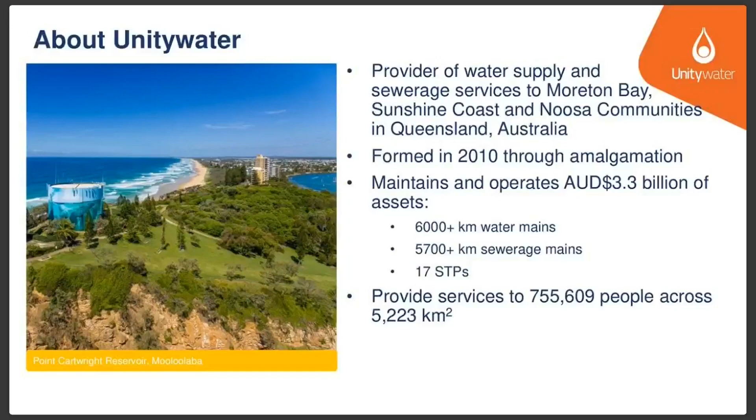If we just jump to the next slide, please, I'll go through these reasonably quickly to try and make up some time. So in the time since we've been formed, there's been a lot of pressure on reducing cost to the customers, our $100 off the bill, and a lot of work has gone into that and forming the business, consolidating a number of things. We started, I think, with 12 SCADA systems and the consolidation that goes with that with the council amalgamations.

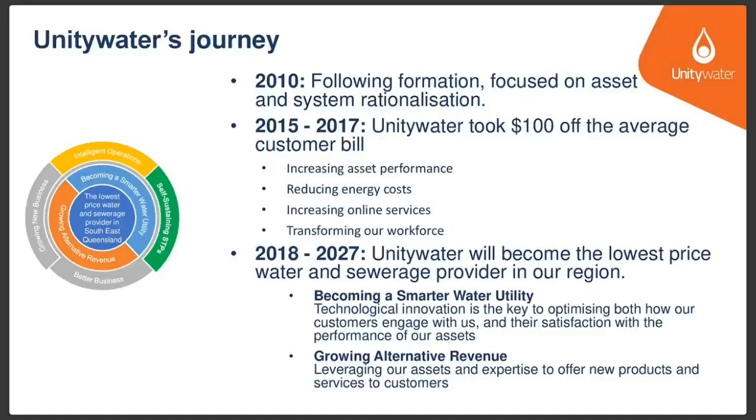So if I just jump to the next slide, there's a lot in that, and I'll spend a little bit of time on this slide, and I'll go through them as quick as I can and just give you an overview of what self-sustaining sewage treatment plants means to us, and then move to intelligent operations. The two are inextricably linked, but I guess in summary, in terms of self-sustaining sewage treatment plants, it's about becoming neutral in terms of cost, energy and carbon.

There's a number of initiatives that we've got up and running and some that we're still planning to do, but if we look at concentrated thermal energy, this is quite novel and new, and it involves heliostats and using heat for biosolid drying. You can also potentially use this, and we want to examine the potential for it to sterilise sludge through pressure cooking and rapid decompression.

To allow that sludge to meet the most stringent of land use requirements, we're liaising with the CSIRO and ARENA, the renewable energy agency here in Australia. Some of the things we're looking at involve footprint size, current state of technology, and our OPEX and CAPEX requirements.

We're investigating a regional resource recovery facility, looking at a number of locations. What would the volume and type of organic matter be? What would our gate fee profile look like? Licensing, state government requirements, and again the CAPEX and OPEX requirements here.

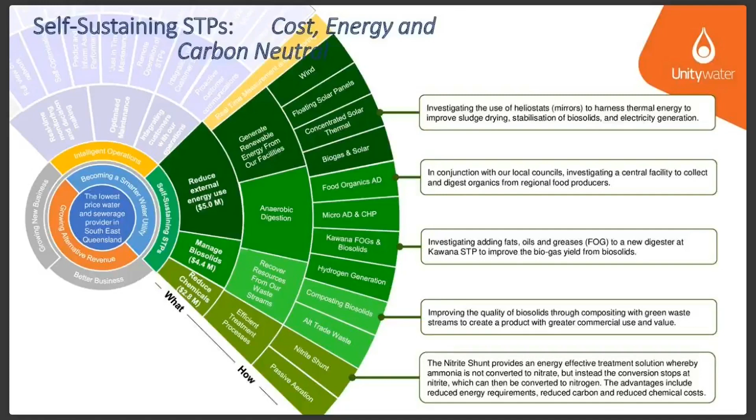So there's a lot in there, and I'm going through quite a bit, but I am very conscious of time for everybody as well, so there might be some questions come up a little later on. If I jump to the next slide.

The next slide's about our intelligent operations. Here what I'm really talking about is, if you take our roughly 12,000 kilometres of combined sewer and water network, it's currently what you might call dumb and passive. How can we make that smart and active? How can we know about events occurring in our water and sewer network before our customers tell us? I think it's incumbent upon a really smart water utility to be able to know that, rather than wait for the customer to inform them.

So I'll go through a couple of these again reasonably quickly. If I focus on sewer monitoring, we're looking for live online sewer monitoring for odour, picking up trade waste transgressions, seawater ingress, identifying odours potentially before they even occur, and if they do occur, certainly knowing about them before the customer does and informs us.

And also there's some intelligence in there with some analytics around asset degradation. If you know the profile of the content of your sewer pipes, and you know your sewer pipe condition, what it's made of, and how old it is, there is some technology that can assist us in determining what our sewer profile is doing from an asset condition perspective.

That kind of intelligence also has an added benefit, because not only are we fixing something for the customer immediately, but the long-term saving in terms of deferring capital, and that saving potentially being passed on to the customer by reducing bill increases, is an important element of that.

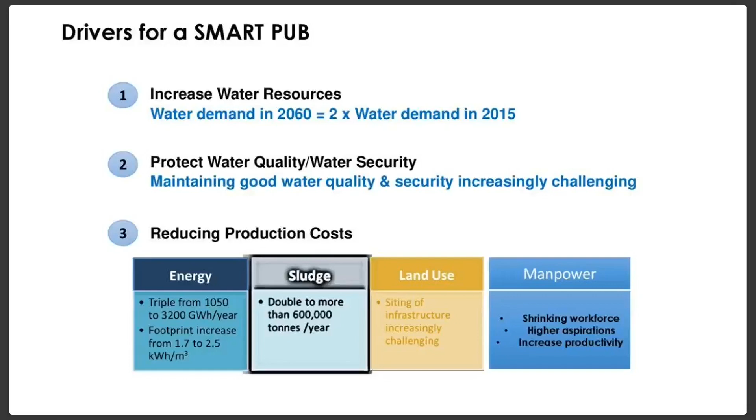So we're looking at 5 main technology enablers to help us achieve that. Of course, IoT - getting data, getting pervasive sensing, getting connected through sensors and devices. With all this data, we're going to fit it into our data analytics platform that will give us new insights as we harness this big data. With these new insights, we're able to fit them into simulations and models to give us insights and plan for what-if scenarios. We also look into artificial intelligence, that is machine learning, for decision support systems. And finally, autonomous systems to replace manpower for the dull, dirty, and dangerous work.

So I'll go into sharing some of the initiatives that we have implemented in PUB.

First up is the Silt Imagery Detection System, which we call SIDS. What it does is help prevent muddy waters from construction sites flowing into our waterways and reservoirs. This simple technology, using CCTV, has been implemented since 2013.

Earlier this year, we collaborated with one of our universities to implement this analytics to automatically monitor the CCTV footages.

SIDS has helped PUB streamline our enforcement efforts. Before SIDS, PUB had to conduct random checks based on CCTV records, which can be sensitive and problematic when we need evidence for prosecution. With SIDS, PUB can monitor real-time data from CCTVs and prioritize problematic sites for follow-up. So far, we have detected more than 150 cases from around 500 CCTVs since 2016.

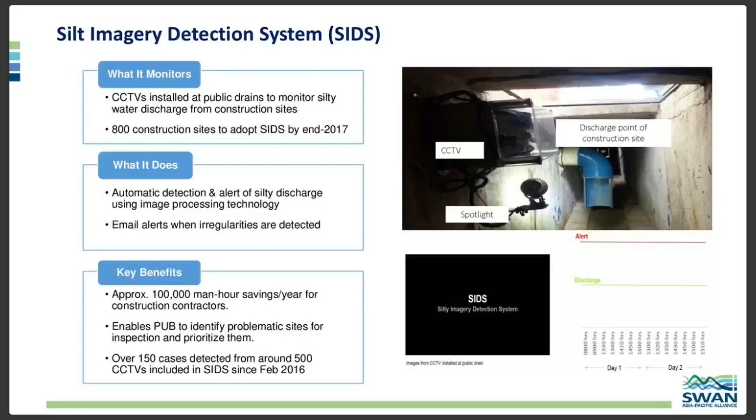Next, I'll share a bit about our water supply network. We've implemented this Smart Water Grid with the objective of helping PUB supply good water 24/7 to our customers. We now have more than 320 sensor stations, covering 75% of our network today.

We're able to better feel the pulse of our network by constantly monitoring the pressure, flow, and quality of our water network. Using this information, we detect pressure and water quality anomalies, and we leverage data analytics to forecast water demand, as well as model different scenarios, so as to better support our planning, operations, and maintenance works.

Some of the benefits highlighted here include pressure management, leak and burst detection, operation simulations, hydraulic modeling, demand prediction, and water quality monitoring on a real-time basis. These are new capabilities that we're developing as part of our Smart Water Grid project.

We are still at the beginning of our Smart Water Grid journey, and we believe challenges still lie ahead, in terms of quality and reliability of the sensors, as well as pattern recognition and the accuracy of the analytics. So we look forward to working with more companies and technology providers to test our solutions in our operational conditions.

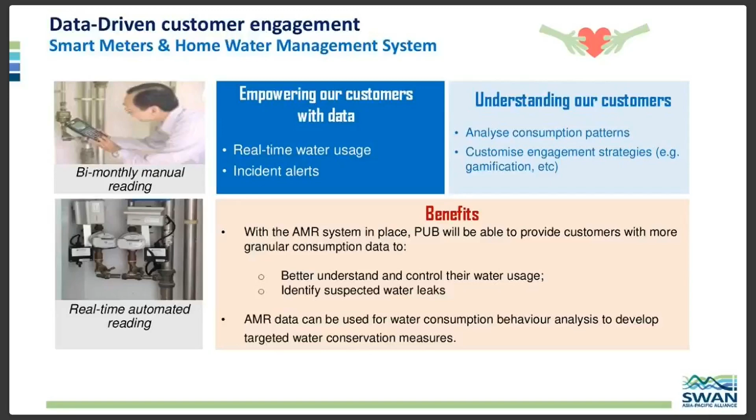With this data collected, from PUB's perspective we are able to understand our customers better by analyzing their consumption patterns, and we can do customer segmentation as well as customize engagement activities and strategies to achieve better results.

Also on the topic of smart water use in residential context, we are now rolling out smart showers, as we want to drill down to the individual water usage areas within the household.

In Singapore, it's hot and humid all year round, with a temperature of about 32 to 34, 35 degrees Celsius every day. So a typical household uses as much as 30% of their water for showers. People take showers maybe twice a day, sometimes 3 times a day, depending how hot the weather is.

PUB relies on technology improvements in the design of shower heads to try and reduce shower water usage while maintaining comfort levels, not compromising comfort. Earlier this year we conducted a trial with a university to collect data with 520 households. Water consumption meters were installed in their shower heads so that end users are able to be aware of how much water they're actually consuming while the shower tap is left running.

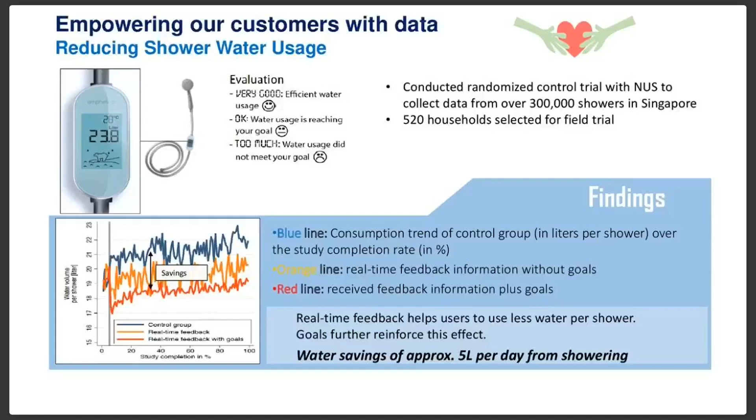Some of the results from the trial showed that providing real-time feedback helps users use less water per shower. Probably it's psychological, but it is useful, it seems. We achieved some 5 liters per day per capita of water savings after installing these meters, compared to a control group without smart meters in the shower. So we see great potential in providing real-time data and feedback to end users. We think it's powerful, cost-effective, a simple and affordable device to influence water usage behavior and help households save water.

On the topic of smart plants and our operations, we're embracing smart technologies to enhance operation and maintenance, looking at IoT sensors, vibration sensors, which we install on our rotary equipment such as blowers, pumps, compressors, to give us real-time assessment and condition sensing of the performance and energy efficiency of this equipment. With this real-time data, we're able to better plan for maintenance - it's predictive maintenance rather than preventive or corrective maintenance.

We monitor pump performance through these IoT sensors, and pass all this information through a data analytics platform that will analyze and do some signature patterning. They can tell us if a pump or a specific compressor is going to fail, which helps us avert any catastrophic or major failure.

Currently we have about 100 of these sensors installed in some of our plants, and we're analyzing this data for trend analysis. It will also help us set better trigger points for different equipment - not too conservative or excessive, and not too little - so we're able to better optimize each maintenance schedule. It provides insights before the equipment needs to be serviced, before any failure.

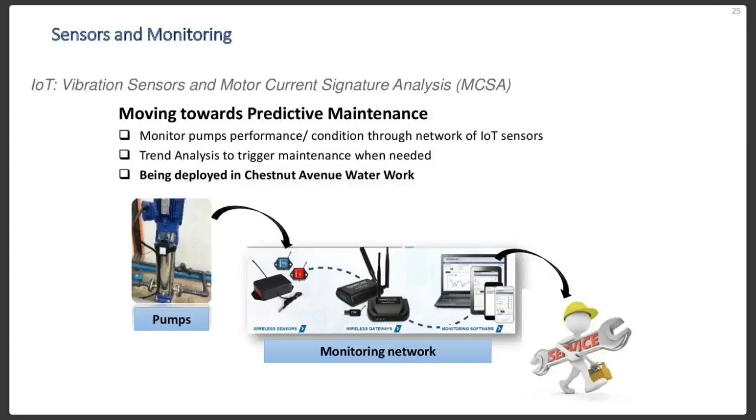Moving into robotics - some of the projects we've done using drones. One area PUB is looking at very actively is using aerial drones beyond just collecting images, but also as a mobile sensor to collect data, especially spatial information of our water quality in the reservoirs and large water bodies.

An example here is hyperspectral technology used to monitor water quality in reservoirs. These can be integrated with a drone for more flexible use, overcoming the constraint of a fixed system. Before installing hyperspectral cameras on drones, we initially had a phase 1 project where we installed permanent hyperspectral cameras at different strategic places in our reservoirs. It captures water quality data - aquatic mapping, turbidity, chlorophyll A readings in different pockets of our reservoir, which was very useful to us. To take it one step further, we're now implementing drones to deploy this hyperspectral technology.

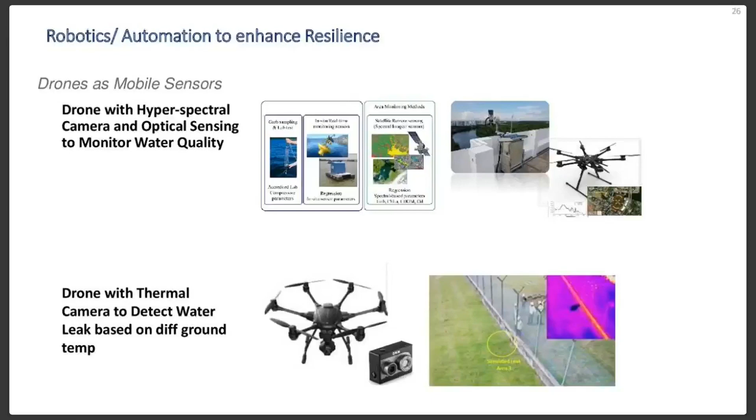In summary, the integration of smart water technologies across Singapore's water loop is our vision for the future of water management. It has to be integrated as a whole to derive synergies and benefits, driven by innovation, informed by data to make informed decisions. So PUB aims to manage the water loop more productively and efficiently.

We need real-time feedback and analysis for better sensing. We need accurate simulations and models to allow us to preempt and manage any potential upsets or impacts. We also want to apply the latest, most advanced technologies to further automate our processes. This is expected to improve our planning, operations, and service delivery to the public.

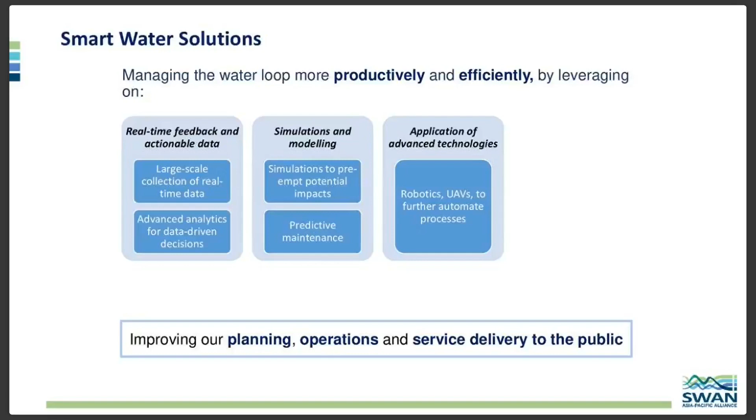This slide shows an integrated smart water loop. The vision is that a smart operating system is built by several smart subsystems working in tandem and in sync with each other. In PUB, we manage the entire water loop from the first drop of rainwater that falls in Singapore.

We collect it via our drainage, our canals, sends it to the reservoir. From the reservoir, we treat this water at our water supply plants. The treated water, the potable water, is then supplied to the taps, to the industries, to the residential areas.

This drinking potable water is supplied via underground asset of 5,000 kilometers of network to our end users, and then it is collected by our water reclamation network, which is conveyed to our water reclamation plant for treatment, either for discharge, outfall, or some of you may have heard about NEWater, which is a high-grade reclaimed tertiary grade water, reclaimed water, which is supplied to the industry for direct non-potable use, and some NEWater is also used to charge our reservoirs.

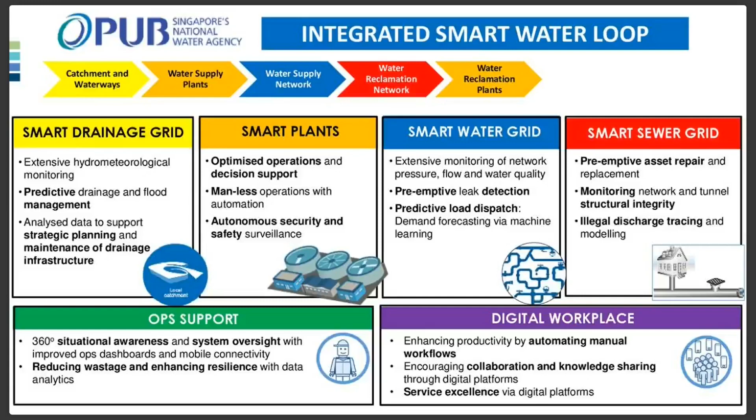And then wanted to add that all of our operations are actually underpinned by a sound foundation of operation support and digital workplace, which we are also in the process of digitalizing and transforming to better support our operations.

So this is my last slide, the concluding slide. As I mentioned, business as usual is not going to be sustainable for PUB and for Singapore. We need to integrate an integrated and proactive management of PUB infrastructure and assets. As with today's workforce, we have about 3,000 strong staff. We need to upskill them to embrace technologies. And right now we're doing a lot of technology deep diving.

We're engaging the industry a lot to develop solutions for us. And these solutions are not immediately deployed in full-scale installations. We typically do piloting and validation and small-scale setups, either in a pilot plant or a demonstration plant, before we scale them up further. And then when we are confident, we will then specify these technologies in our full-scale tenders.

With that, I end my presentation, and thank you very much for your attention.

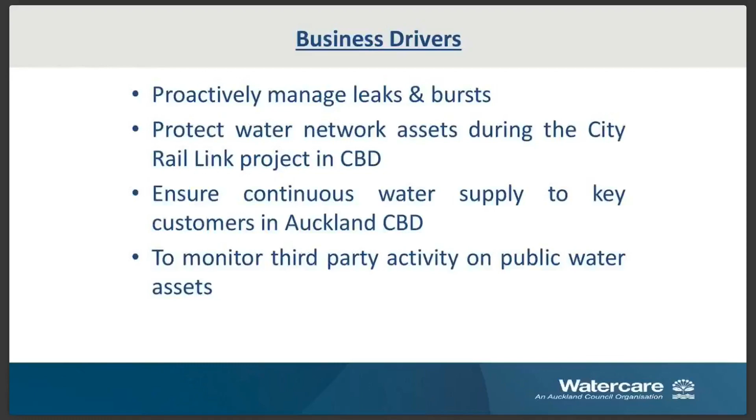So the solution we implemented was a sensor-based solution to collect high-frequency pressure and acoustic data. It measures pressure 256 times a second and acoustics hourly. We put 15 pressure sensors covering 130 kilometers of pipe works, each sensor typically covering around 9 kilometers. We also installed 15 hydrophones for acoustic data to look for small leaks in the network. All this data is collected and the analytics is provided by our chosen vendor for this solution.

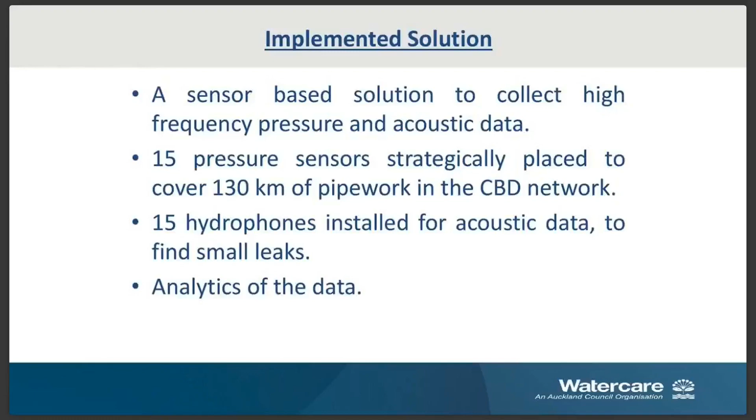The key features of this solution are to report the status of the network and provide analytics from the data, and importantly, to get notified of events within 30 minutes of them happening. We also want to predict future failure points due to water hammers in the network, and this enables us to track network changes a lot more easily.

So what I'm going to do now is pass you on to Nish, who's going to tell you a bit about how this works. Thank you, Mark. Hello everyone, my name is Nish. I'm going to take you through the next few slides, covering a bit of the technical aspects of the solution.

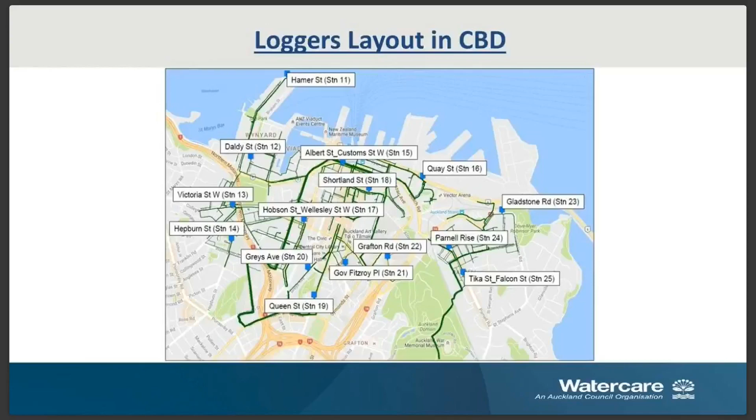Looking at the slide right now, these are the 15 locations we chose for our logger layout. GIS data was used to strategically place these 15 loggers to ensure we have the maximum coverage using the minimum amount of loggers. The logging equipment used at each location is shown on the next slide.

So this is the typical installation we've got in the CBD. Initially all of this equipment could fit into the fire hydrant, but since we wanted a sustainable solution with a solar panel, we couldn't change the design of the existing fire hydrant lids because of legal requirements—it needs to be yellow.

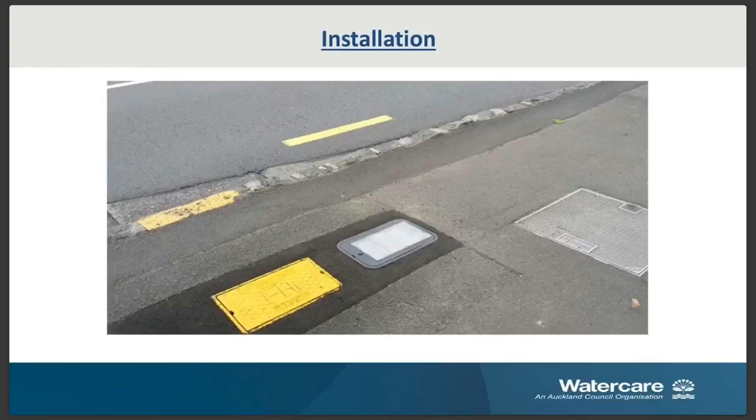Now the next slide is a very simple diagram showing the process, how it actually works. The basic thing you can pick up straight away from the graph is that a lot of the process is quite automated. A lot of the analytics that takes place is automated, with only a bit of manual intervention required. So basically the way it works is the data is collected by the logger for pressure data and acoustics data, and it's sent into the cloud where all the analytics take place.

Within the cloud, transients, leaks, and any pressure changes are identified from the data. All these issues that are identified are ranked from 0 to 10, with 10 being the worst issue, after comparing the data from neighboring sites to correlate what the issue is, and by looking at historical data to make sure it's not something regular in the network, but actually an event or incident that's taken place.

So after that, all the issues ranked above 6 are flagged into the system, and this is where the manual intervention comes into play. The control room is manned 24/7, and they look at these flagged data items, do the final verification, and send an alarm back to us just to make sure what they've figured out is actually an event or not.

Now what they do is they send an alarm using a text message and an email. The email has detailed information about what's been picked up, what they think it is, and the approximate location of the fault.

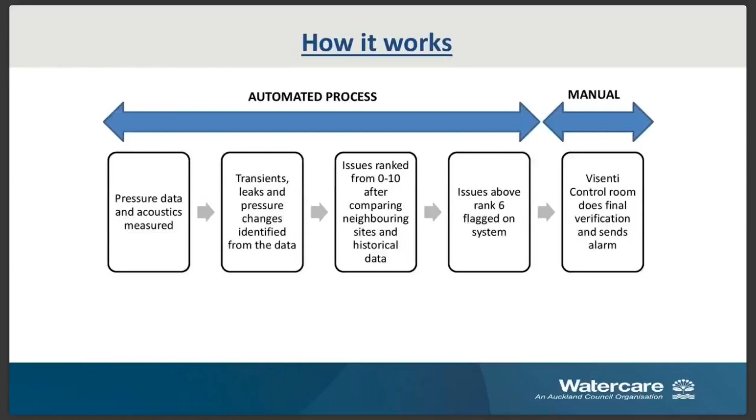Some of the lessons we learned while implementing the solution and during the one-year trial: the first lesson was there is a transitioning or learning phase after implementation. We noticed this when we started getting a lot of alarms, and eventually figured out those were daily trends and patterns that happen in the system by usage, and they were all false alarms. But after a month, once the system recognizes these as daily occurrences, it starts taking them out of the equation and only flags the correct alarms. That was a learning phase that happens when the system is installed initially.

The second lesson we learned was that network interference can affect the analytics of the software itself. An example was a burst main in the CBD, literally 50 meters from the loggers, and the logger didn't pick up the burst at all. We eventually found there were shut valves between where the burst occurred and where the loggers were, which stopped the transient activity from traveling to the loggers, making them blind to it. Network interference can affect your analytics because the system, when given the GIS data, assumes all valves are open and signals should reach the logger.